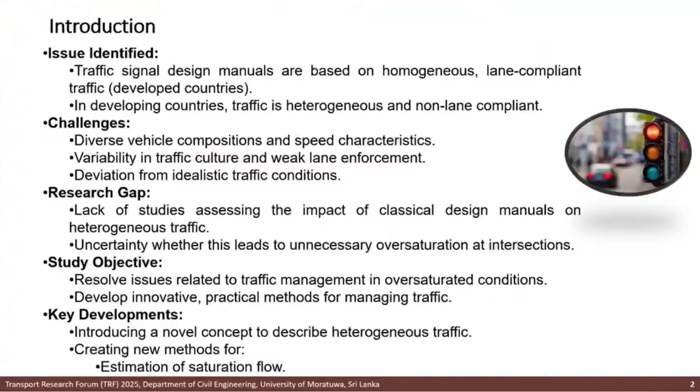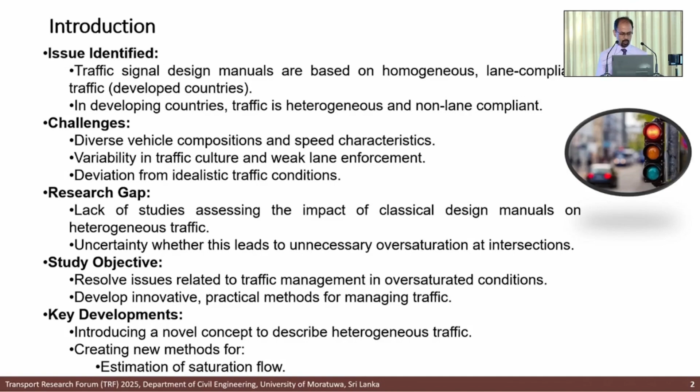Part two is, even if we have the real-time data, what we are going to do with that. There comes the problem, and this is an effort we are going to solve. How are we going to solve it? So the study objective is to resolve issues related to traffic management in oversaturated conditions and develop innovative practical methods for managing traffic.

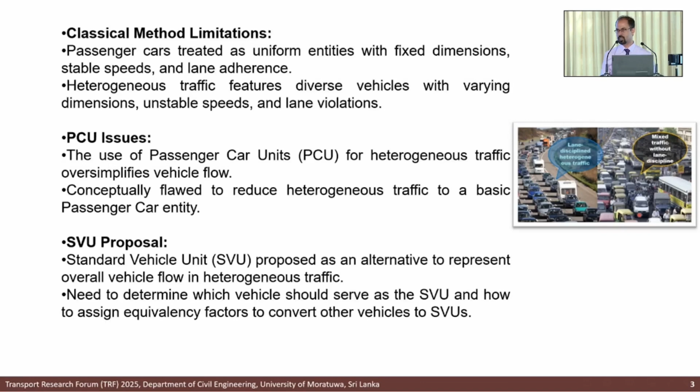If we go to classical method limitations, we are considering PCUs like passenger cars, so we are converting everything into PCUs. The problem is, is it okay to convert all these into PCUs? Sometimes if we consider an intersection, most of the vehicles we are seeing are three-wheelers and motorcycles. So we are converting everything into a non-existing entity. Is this correct?

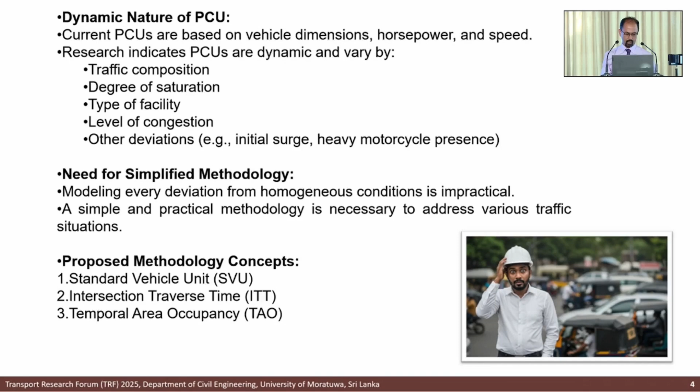So in that case, I'm going to introduce three concepts: standard vehicle unit, intersection traverse time, and temporal area occupancy. So much research in the literature review shows that PCUs are dynamic. So how are we going to cater for this dynamic nature of the PCU? For that I am going to introduce these three concepts: SVU, ITT, and TAO.

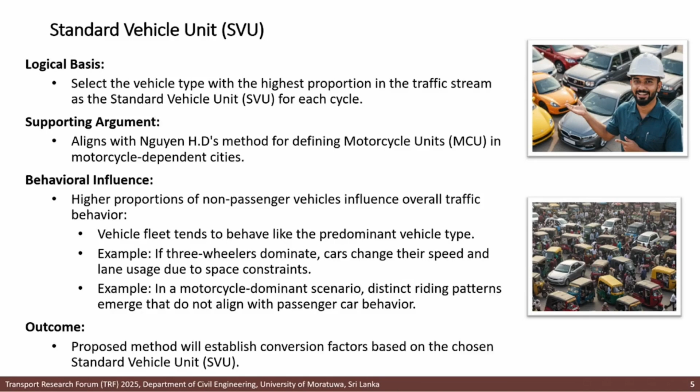So I'll just go to the SVU. Here I am going to select the vehicles having the highest proportion. That may not be a car — maybe a three-wheeler, a motorcycle, or maybe a car at all. This supports the literature review in Nguyen's study, where they are converting everything into MCU in Vietnam because the motorcycles are heavy there.

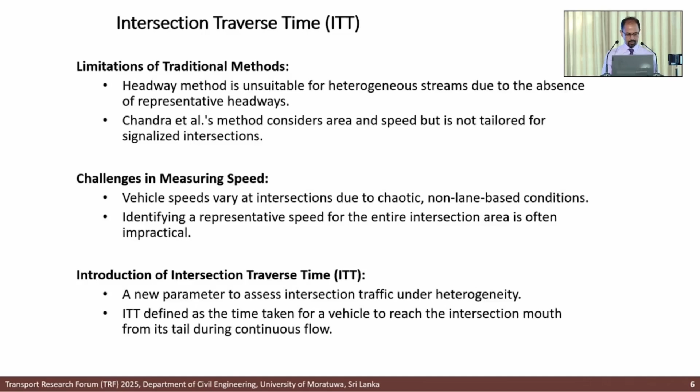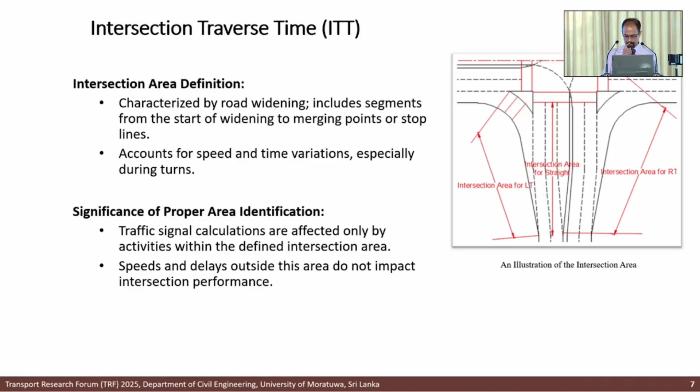Then intersection traverse time. Intersection traverse time means I am going to measure the time a vehicle takes to come from the intersection tail to the intersection mouth — that is, not to cross the intersection, but coming from tail to mouth, where the intersection starts to the start of the intersection. Then the time taken, we can measure that. So here you can see this is the intersection area and the time taken for each vehicle to come from tail to mouth. Then it is very much necessary to identify the proper area.

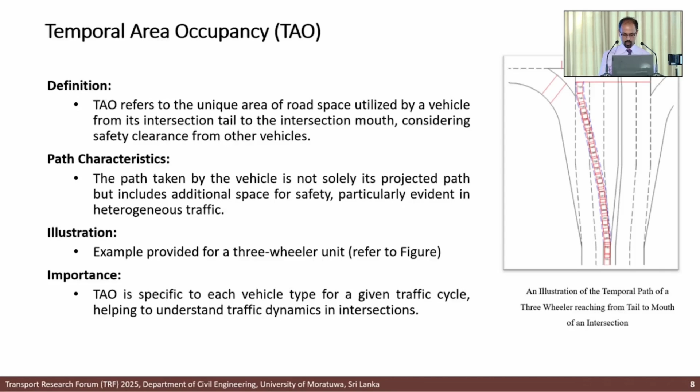And then temporal area occupancy. Temporal area occupancy is the area that is being occupied by the vehicle when traversing this area, this length.

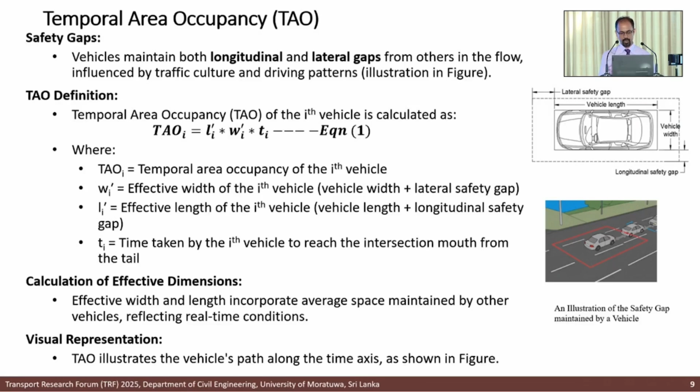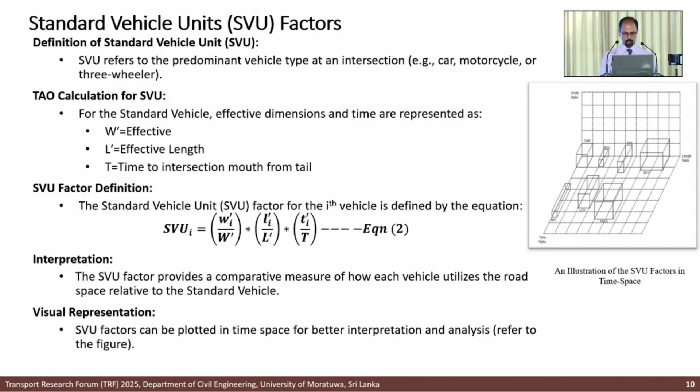Temporal area occupancy is calculated as effective length into effective width into the time taken to traverse. With that, I considered the proportion of a standard vehicle to any vehicle, this standard vehicle unit, as the temporal area occupancy of any vehicle divided by the temporal area occupancy of the standard vehicle.

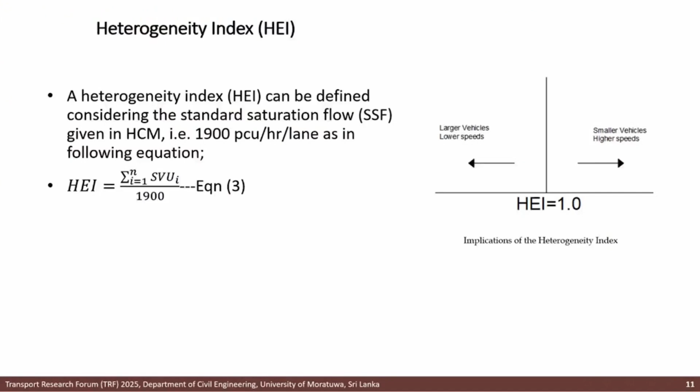Then I defined a heterogeneity index, that is the accumulation of the standard vehicle unit divided by 1900, which is the standard saturation flow given in HCM. So that gives me a way to quantify the heterogeneity of an intersection.

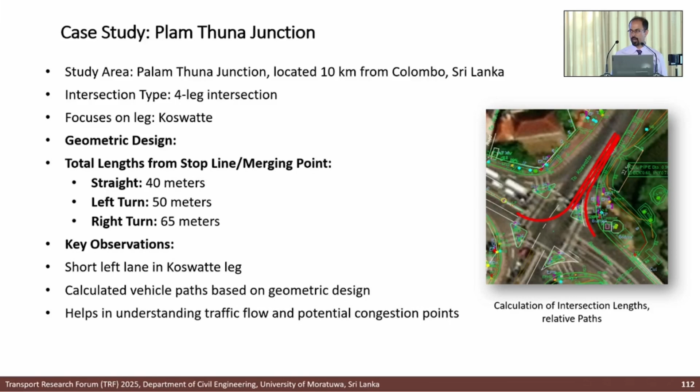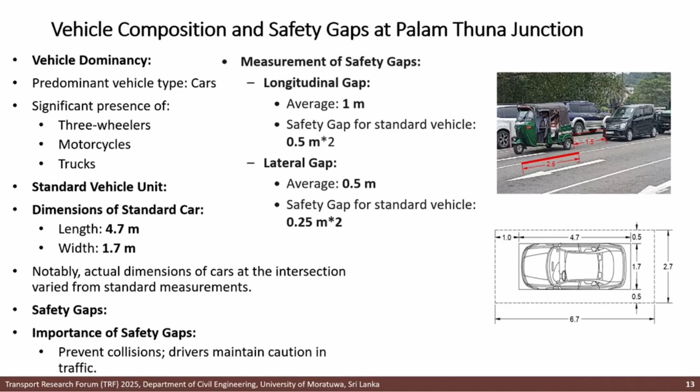With that, I took a case study at Palam Thuna Junction. There I measured all these things: the vehicle length, vehicle width, and the safety gap they are keeping. Then I had a data set, that video set, which shows how the vehicles are moving.

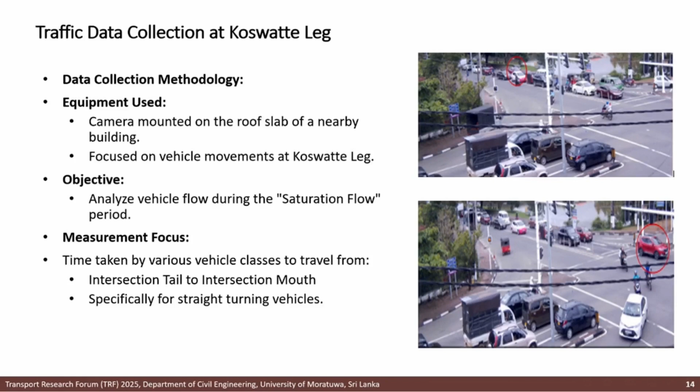When a vehicle starts at the intersection, I took that time, and when the vehicle passes the intersection, I took that time, which gives the traverse time. With that, using my earlier defined parameters, I could come up with a PCU factor. I'm calling it PCU here because the major vehicle type was cars there.

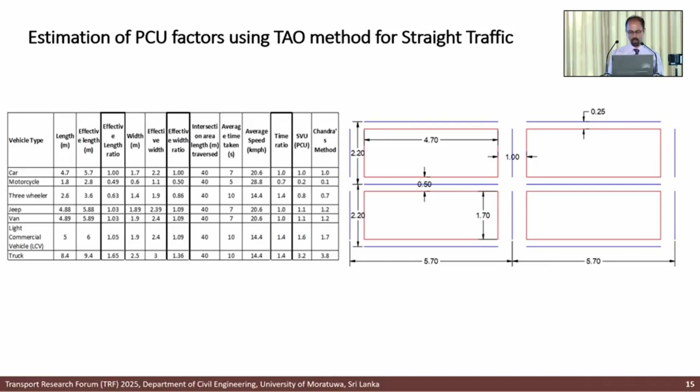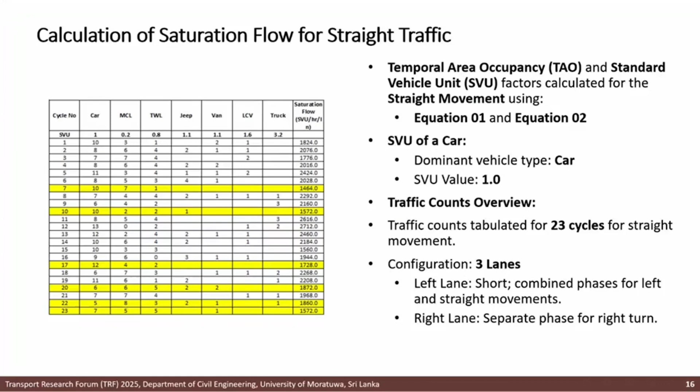Then I calculated saturation flows, and based on that, I back-calculated to check if it is 1900, what should be the PCUs.

Why did I do that? Because I'm going to give a concept saying that in an intersection, vehicles arrange themselves to maximize their flow, not just in space but temporally and spatially - that is their intention. So if that maximum flow is taken as 1900, then these PCUs are derived. But then the problem is, if 1900 is the maximum flow...

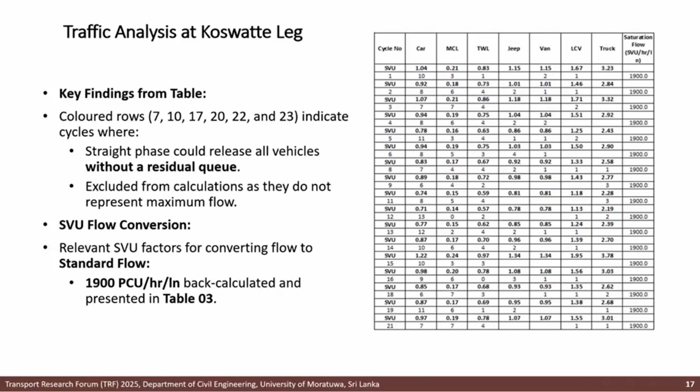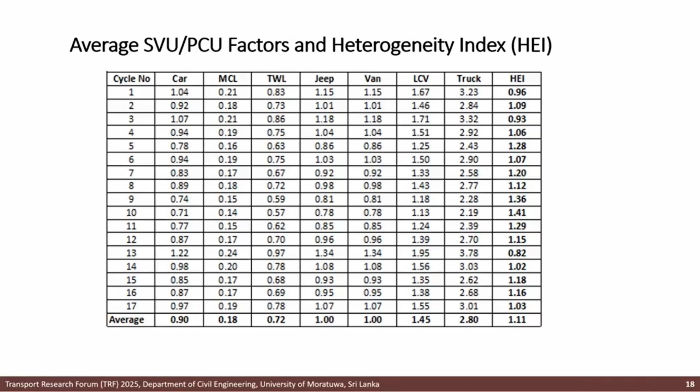What I can say is, if that heterogeneity index goes above 1, we have to consider that value and again back-calculate to check it. We can see in some cases the heterogeneity index has gone above 1, which means we have to take the maximum of this and then back-calculate to check the PCU values.

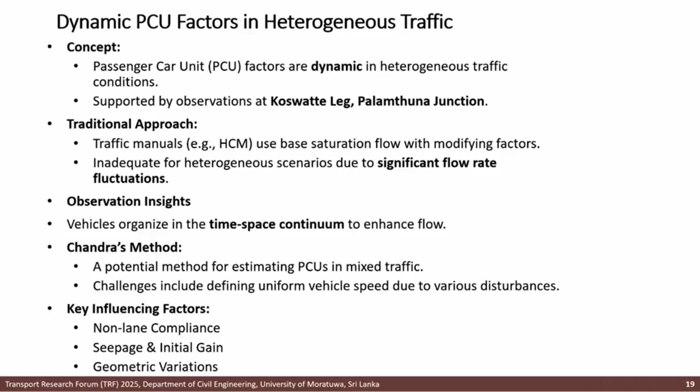With this, we can establish the dynamic nature of heterogeneous traffic - vehicles organize themselves in a time-space continuum to enhance flow. This is how Chandra's method works.

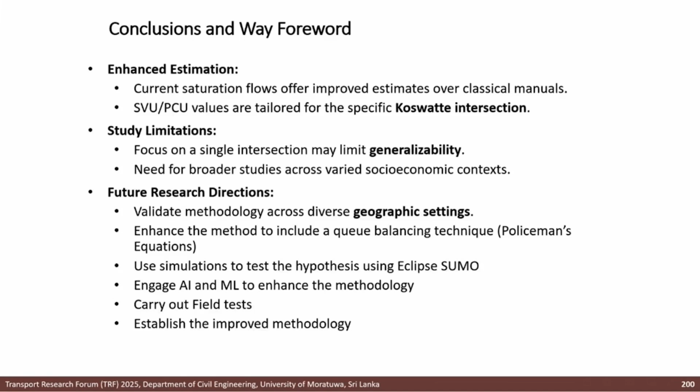My conclusions are: current saturation flows offer improved estimates over classical manuals, and SVU PCU values are tailored to the specific context of the intersection. So for each and every intersection, we have to do this separately.

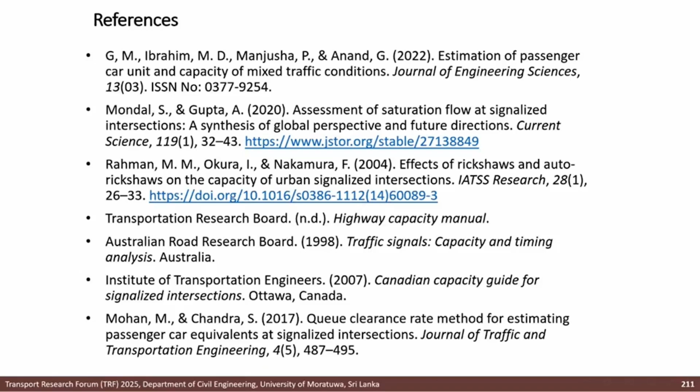This research is not finished. I have to justify this with many other junctions and with many other geometric parameters, and with simulation I have to check whether this would work. If it works, I am going to develop an AI and machine learning program to do this on site, and with that, I am going to set the traffic signal. Thank you very much.